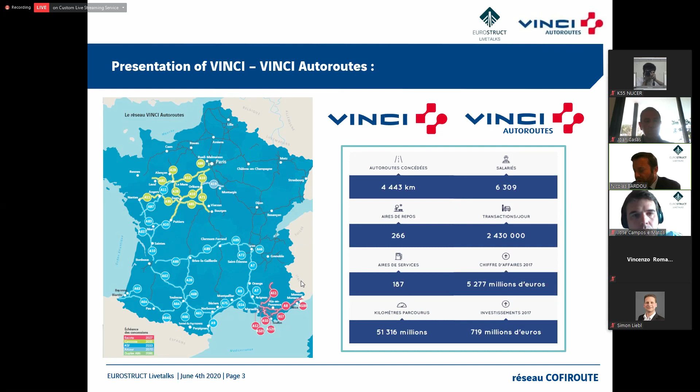Regarding this context, and to cope with the urgent need for new infrastructure in France, many innovative techniques have been implemented on the French national road network, with the background goal of economic optimization and speed of design and construction. And this is how the steel culvert was born.

But what is a steel culvert? This is a buried steel culvert. It's a composite structure consisting of a flexible metal structure made of corrugated steel, assembled by bolting, which is embedded in a compacted embankment.

It can be used as a hydraulic structure in drainage systems to restore waterways, or as a dry structure to restore roads or agricultural traffic on fauna paths. Buried culverts are recognized as bridges for diameters exceeding 2 meters according to French standards, and some of them have an opening greater than 6 meters.

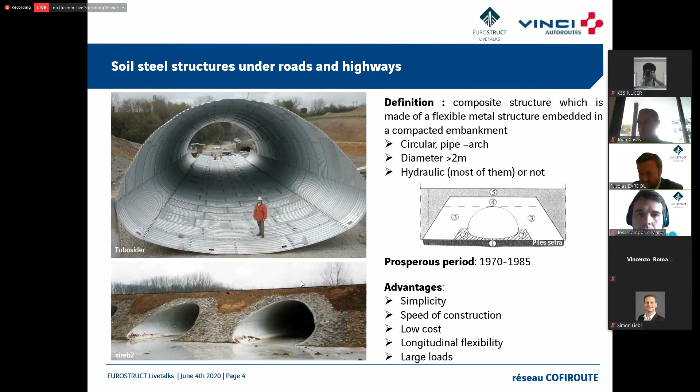But this heritage is now confronting serious problems. Steel culverts were generally located in unfavorable environments, with the presence of water or aggressive soils and the transport of solid elements, which cause degradation of the culvert at the level of its walls, in the tidal area, and of its raft. Corrosion can also be very significant on the backfill side, and therefore not detectable during visual inspection.

The infiltration of water loaded with de-icing salt, for example through the embankment from the platform, is also a factor accelerating corrosion. Overall, the national heritage of metal culverts is aging. Many of them are approaching 35 to 40 years, which is close to their actual lifetime according to a survey of managers of national road networks. For example, some manufacturer catalogs expect only 25 years as the lifetime for this kind of bridge. Steel culverts are part of a sensitive bridge family, identified as having a risk of sudden failure given their design.

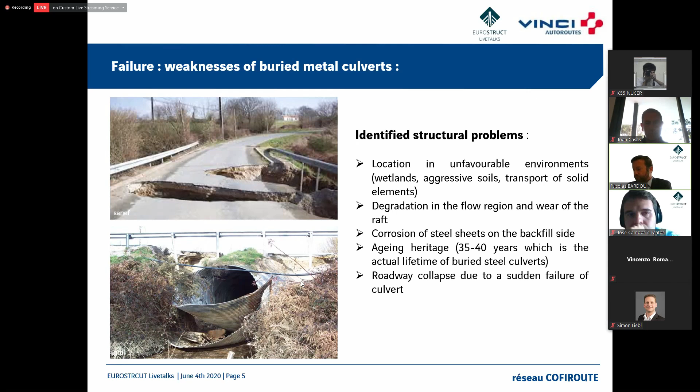So, at the French national level, we estimate about 3,000 buried steel culverts, and one-third of them are in the Vinci Autoroutes network.

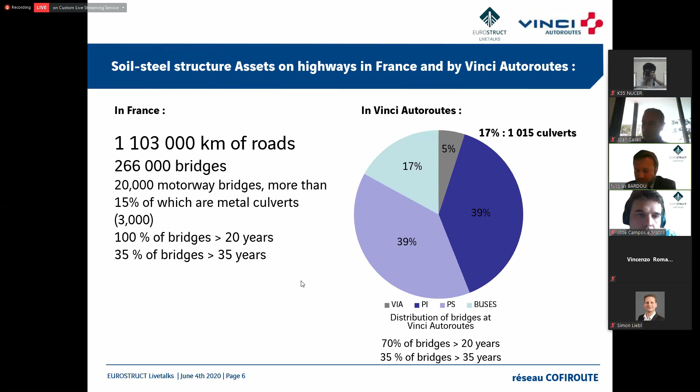So I will give you some information regarding the way that the company would deal with this kind of problem.

We have by now a focus on one of the three national networks, and this is near Paris, with a lot of de-icing salt.

So we did a multi-criteria analysis to assess the disorder and prioritize the action. To date, more than 50 culverts have been replaced.

To give you an idea, the cost of replacement ranges from 200,000 euros for a small diameter to more than 2 million euros for a bigger, larger one, and the cost also depends on the hydraulic and environmental constraints.

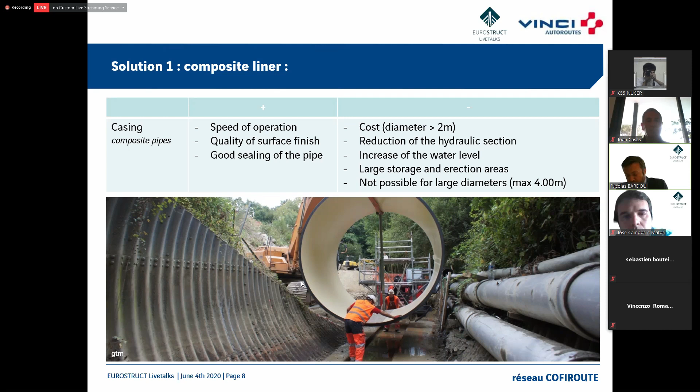The second methodology used in the repair of metal culverts is reinforced concrete. This technique is well mastered and simple to justify by calculation. It can repair culverts of any diameter.

The typical wall thickness is 200 millimeters, and therefore it reduces the hydraulic section, but requires less development in the downstream and upstream areas.

However, the on-site works are substantial. Reinforcement, formwork, and concreting works lead to a long planning schedule, often incompatible with the allocated period of intervention.

To reduce the duration of work, it's possible to provide more formwork to improve the construction cycle, but these pieces of equipment are very expensive and difficult to amortize over relatively short culvert lengths. On average, our culverts are a few tens of meters in length.

At last, the management of the risk associated with flooding events is very random.

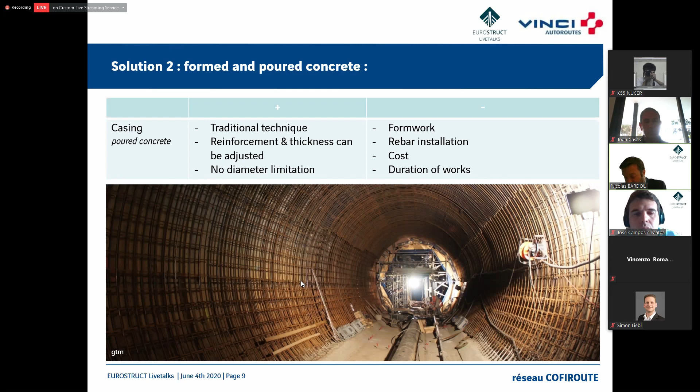The third classic repair method is the implementation of dry shotcrete. This technique offers the advantage that it does not require the use of formwork and can accommodate local deformation of the culvert, in particular an inverted profile, for example.

However, it requires the installation of reinforcement beforehand and generates a large volume of waste due to rebound of aggregate against the steel sheet, up to 50% loss.

That material must be disposed of in landfills, which is also a cost, and the work has a significant environmental impact. And you can imagine this kind of work in a hydraulic section.

So a new solution appeared really recently, less than one year ago: this is UHPC, sprayed UHPC. This new solution has been developed very recently in France by two French companies, Lafarge and Freyssinet, which is one of the Vinci companies.

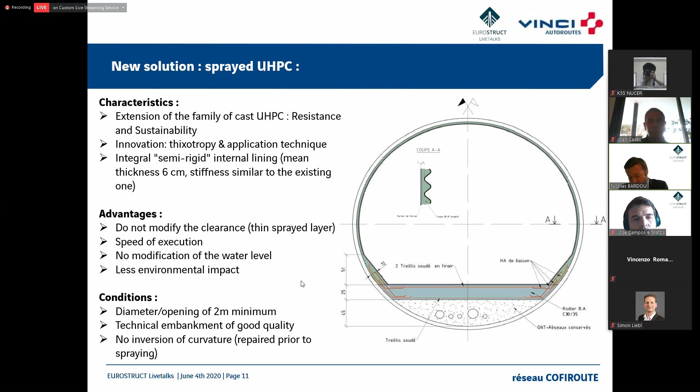But there are some application conditions. This is limited to a minimum 2 meter opening. It needs a very good quality of backfill, and I'll explain why after. It's not possible to apply when there is inversion of curvature, which implies preparation work if your culvert has some inversion of curvature.

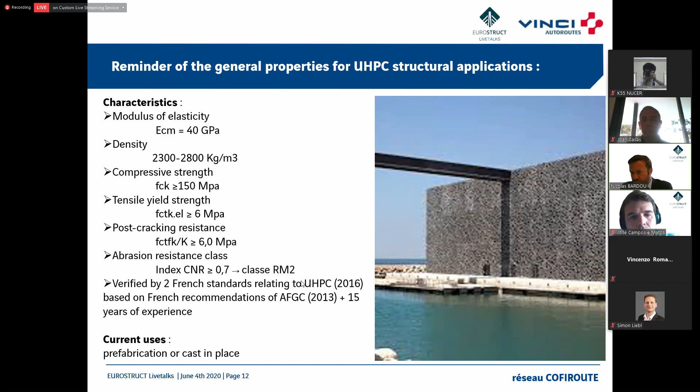So I made this presentation not specifically regarding UHPC, but the idea of this innovation was to fit with all the UHPC structural characteristics. I don't know if this presentation will be available afterward, but you can retain the main remaining properties of UHPC.

So what is the concept of this innovation? The main innovation is based on the thixotropic behavior of the sprayed UHPC, but also on the implementation process: mixing, pumping, and spraying. On one hand, the rheology has been engineered so that the layer of UHPC does not sag when sprayed on the wall. No stiffening admixture is needed, which makes the solution robust. On the other hand, specific equipment has been developed to mix, pump, and spray this highly thixotropic material, whose mechanical properties are enhanced by the spraying process, in particular the compression strength.

There is low air content. The concept is to reinforce works mechanically as a composite using the interaction between the soil and the UHPC structure. This is not like the traditional replacement technique; we take advantage of the soil-structure solution.

If the soil has too poor stiffness, the composite will not work efficiently. It is therefore essential to know the nature and strength of the embankment, really more than for other solutions. It's also necessary for the other techniques, but less critical.

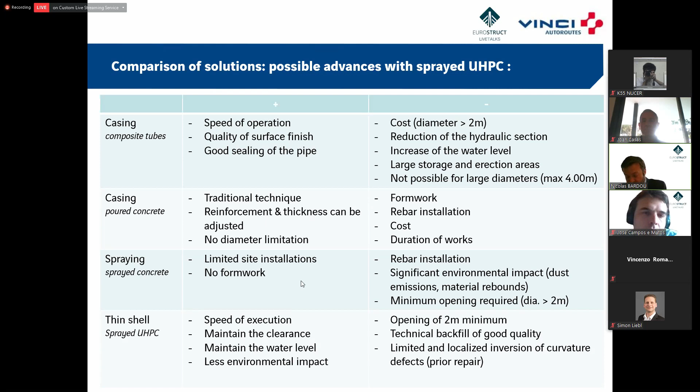So the development of this followed this path. First, it was necessary to work on the formulation of the material: rheology, adhesion, mechanical performances, as well as the development of specific equipment for mixing, pumping, and spraying the material, while controlling fiber orientation and percentage of loss, which was maybe the main challenge.

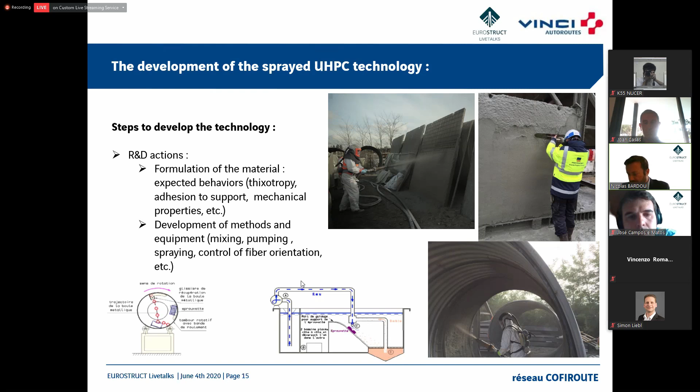The second path was laboratory tests to characterize the material according to the French standard for cast UHPC: compression, tensile strength. I guess in the audience there are people from Université Gustave Eiffel. It was IFSTTAR, this French National Laboratory, that accompanied this design process. The purpose was to confirm that the material can be classified as a UHPC for structural application.

The third part was the numerical models. Three numerical models were developed in order to perform calculations according to Autoroutes standards. The first model was a simplified approach for pre-design. The second was a linear approach, and the third was a non-linear approach with soil springs and explicit soil modeling.

The following path was that the modeling had to be validated by a full-scale test. A new steel pipe reinforced with sprayed UHPC had been loaded to failure.

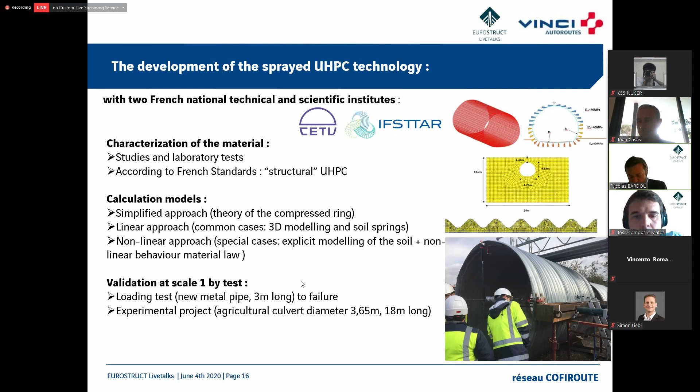So now I'll give you the case study: the reinforcement of a bridge in the Cofiroute network near Paris. I have to say that innovation is in the DNA of Vinci Autoroutes, so when the Freyssinet partnership proposed to experiment with this promising new technique, I naturally seized this opportunity.

We chose a structure near Paris on the A10 motorway, one of the main French motorways, with nearly 80,000 vehicles a day. It was selected for this first implementation because the culvert is a dry structure, which allows easy monitoring of the reinforced structure's behavior at a young age. It was really important to be sure of this monitoring.

The culvert is about 47 meters in length, with a circular shape, a diameter of 3.7 meters, built in 1971.

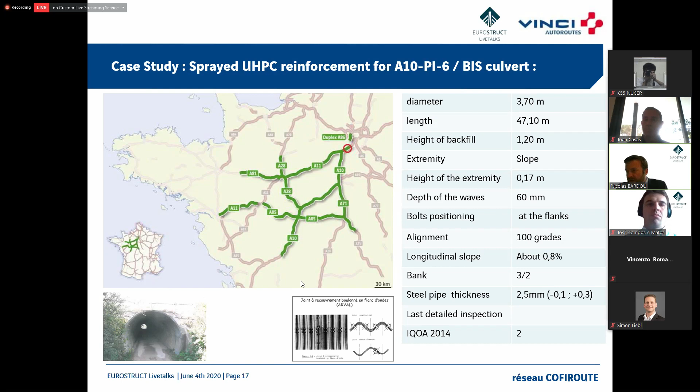The UHPC reinforced has a mean thickness of 75 millimeters. The sprayed UHPC is also coated with a thin mortar, 2 centimeters, to embed the protruding steel fibers that may hurt the user. The main geometric and functional features are recorded on the side, as you can see.

So the main steps of this process were, first, the site investigation studies. The soil investigation is really important for this concept, and all the calculations are also really important. We can verify all the calculation hypotheses regarding the soil investigation results.

The second step was the works: casting of the raft in reinforced concrete with a flat surface for the traffic, cleaning and preparation of the surface by light abrasive blasting, construction of the UHPC shell with production of 6 rings a day. All this work was controlled by my services, and also we gave a mission to a French national agency to help us lead this process.

And we also decided to monitor during 10 years the deformation of this bridge. There is a lot of control, compression tests and bending tests, and our main issue as an owner is the sustainability and operability.

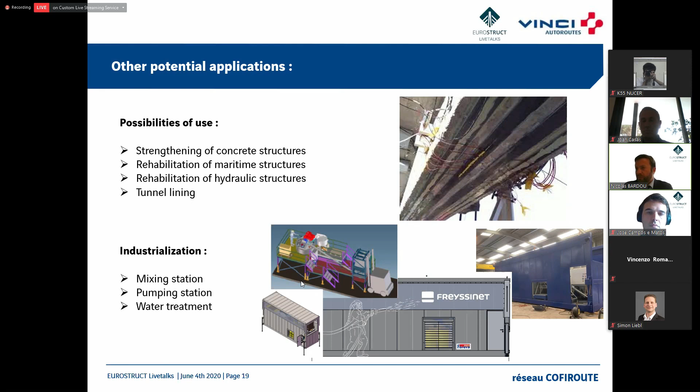So to conclude my presentation, I can say that for us, and maybe in 30 years, we have the problem of metal culvert bridges due to corrosion. We implement a lot of solutions, but regarding the really strong constraints on environmental issues, the thin shell sprayed UHPC could be a really good solution for us. And we can also imagine the extrapolation of this solution for other repair, other maintaining.

So I finish my presentation. I'm sorry for my English, which is not as good as I would like, but I think it will be enough to be understood, and I am available to answer your questions.

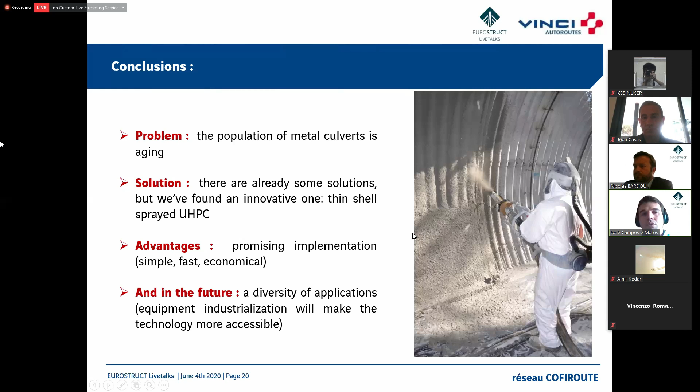So, Nicolas, I think I have the right to ask you my first question, which is concerning the yearly maintenance planning and the costs that you have with the culverts compared with others. What is more or less the relevance in terms of yearly maintenance costs? And also, are you using any kind of criticality indicator in order to identify, among those culverts that exist now, which ones are in a more risky situation and need action now, versus those that can wait for a later period?

Yes. According to the French standard and according to the way we have to deal with our bridge management, we follow all our bridges. We have really strong inspection campaigns. For example, each year we have a summary inspection of our bridges, and we have complete inspections every 5 years by engineers. For the most critical ones, we have more than visual inspections. We also size, for example, the thickness of steel in these structures, each year.

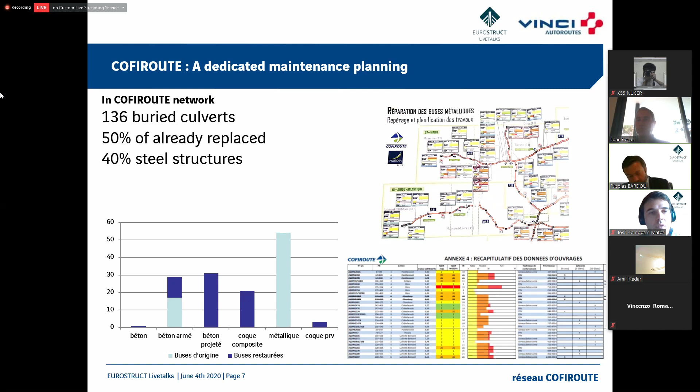The preparation is relatively simple. I'll give you the presentation. It's basically simple. The preparation of the steel is only a light abrasive blasting to help the adhesion of the concrete, the UHPC, on the steel. In some situations, we also have to put some steel networks to help at the most vertical places.

And in the picture, for example, you have the experience we did in the Cofiroute network. In some places, they put some steel networks, it was not for structural behavior, it was only to help the adhesion of the concrete on the culverts. I guess that by now they work on the concrete formulation in order for it to not be necessary to put this kind of network.

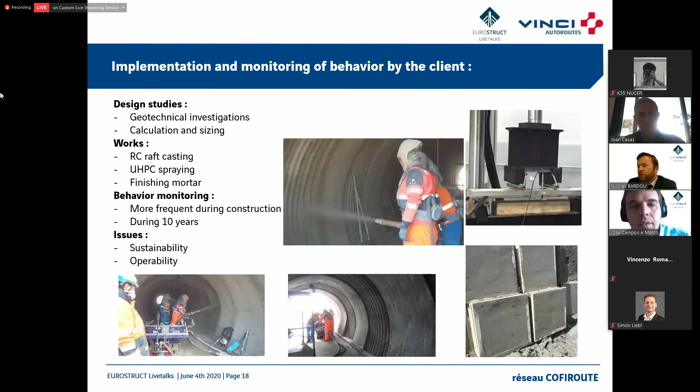Another question: is the process that you spoke about a wet mix or dry mix sprayed concrete, and what components are mixed before spraying? You spoke about that previously regarding the traditional technique - the spraying process of the concrete. Yeah, it's a dry spraying process. And what components?

It's in this situation, a relatively traditional composition of concrete with a limited granulate size, but you are not in this situation. It's only concrete without fibers, because in this situation you have to put your steel before you spray the concrete. I don't know exactly what adjuvants, the special adjuvants that give the good rheology. I don't really know, but there is no fiber adjuvant in this fiber addition in this situation.

Okay Joan, I don't have more questions in the chat, so I would like to put my own question. Is it that after this experience, after all these years of using this system and all the problems that appear related to corrosion, the damage, and the cost to repair these damaged culverts, do you think that for new culverts this is still a good solution, or would it be better to use the traditional way of concrete, either in situ or precast? What do you think?